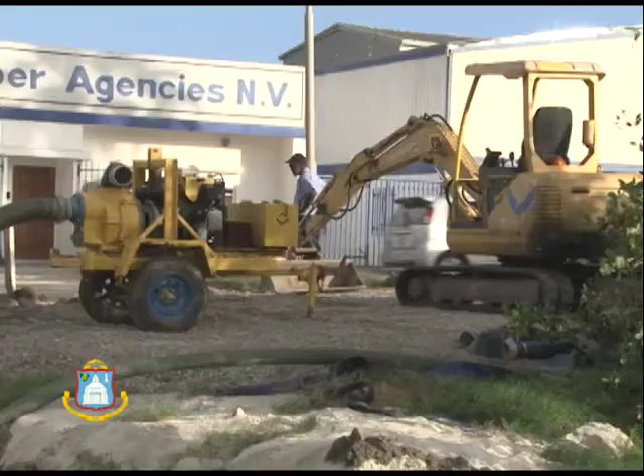In the last torrential rains, we were very unfortunate to have an issue with 2 of our pumps, which made water management a little more difficult for us than we had hoped. One of the problems was that the salt pond could not take all the rainwater that came in one shot because the floodgate only had a certain capacity. To be very precise, a maximum of approximately 5 square meters area of passage. The expansion, in accordance to IHE UNESCO, is going to now create anywhere between 10.5 to 12 square meters of passage, meaning that we have built for a 100-year storm.

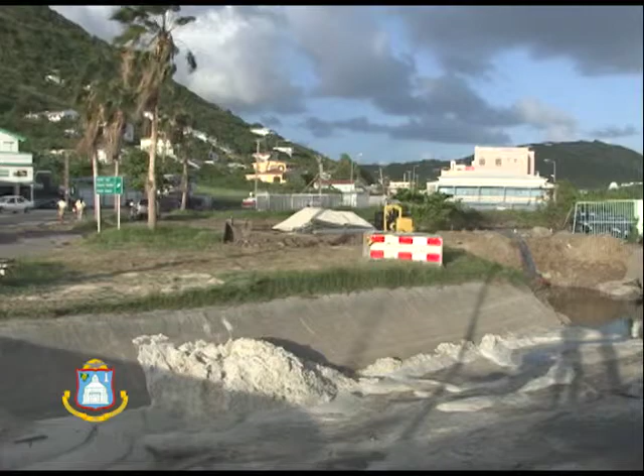All of the water that comes down in the channel behind the ball field, because that's the Zeger's Gut channel that comes down by the bridge, all of that water will be directed directly to the floodgate, and the new floodgate will open up, and that water will have a free passage. A passage that can take all of the water that is accumulated in the hills through that channel. It is constructed in such a way that the water speed will not exceed the danger limit of 3 meters per second. So the water will not flow faster than 3 meters per second because we have enough volume.

These are the thoughts behind the construction design of that second phase of the IHE UNESCO plan, which we are now executing. The third phase, which is now being prepared for tender, is the extension of the Zeger's Gut Trench all the way under the Zeger's Gut Bridge, behind the bird lookout, making a 90-degree turn towards the floodgate. That is the third phase. That phase will be constructed in 2015, and then we would have complied with the IHE UNESCO requirements to be able to do proper water management of the salt pond and the fresh pond.

Today I will explain to you the time frame and the project of the second part of the IHE UNESCO report requirements, which is the expansion and reconstruction of the floodgate located at the A.T. Illidge roundabout with Zeger's Gut. The commencement time has been set for November 2014. Anyone that has passed the floodgate lately would have seen some maneuvering going on down there. There were two stages. The first stage was to allocate all the utilities, and the second stage was commencement of work. On both sides of the floodgate, we are confronted with utilities.

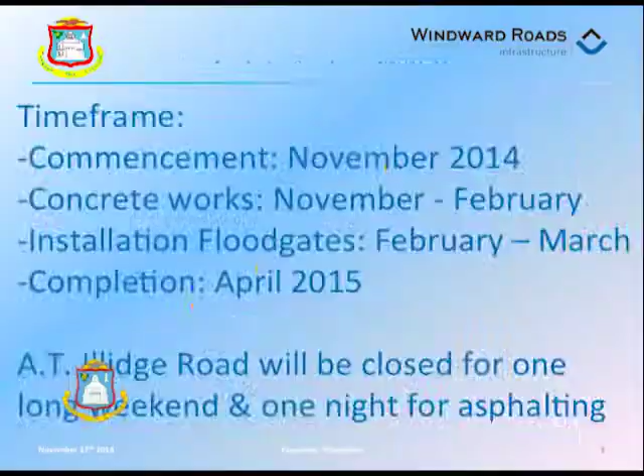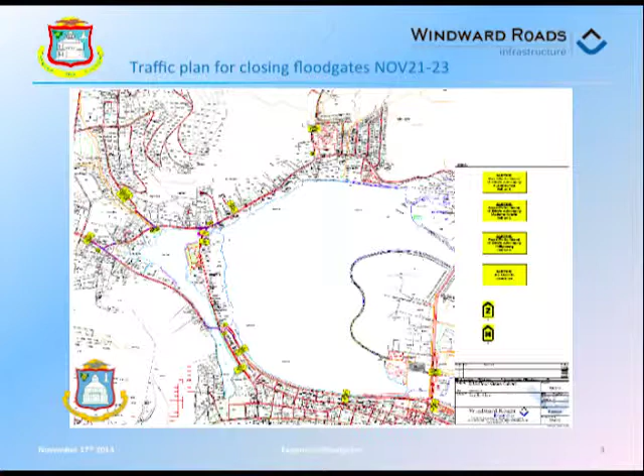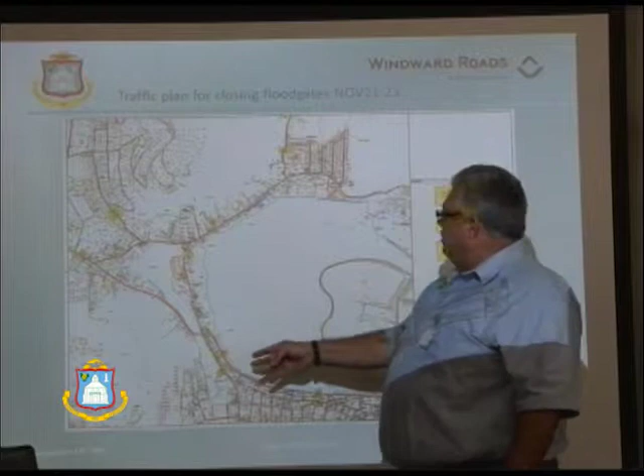At this point in time, I'm going to move towards the board so I can give a better elucidation of what's going to happen with the traffic starting tomorrow night at 7 o'clock. This is the floodgate here. This is where the works are taking place. Anyone coming down from Mount William Hill or from the Arch Road cannot use the A.T. Illidge Road once they pass the roundabout or the Eddies Auto Supply. They'll have to continue on to Zeger's Gut and get on to the Bush Road. If they want to go to town, we would advise them, take the Arch Road, take the road by the dump, and you will get back into town much easier.

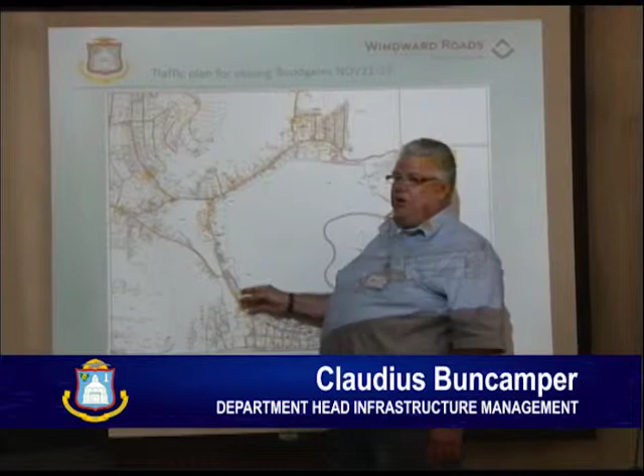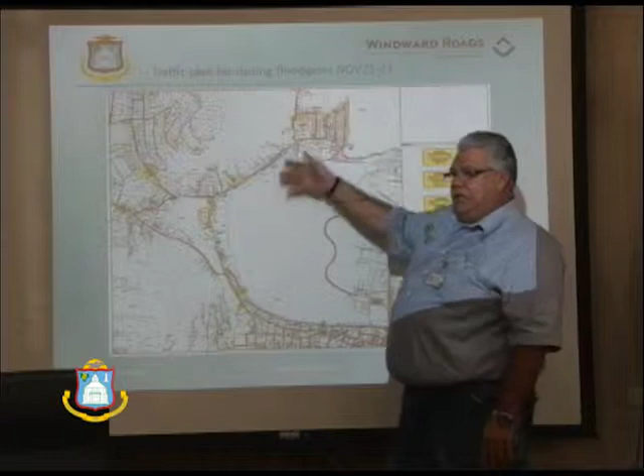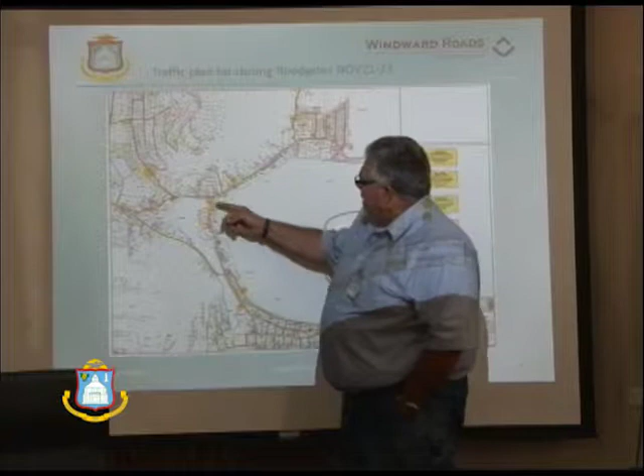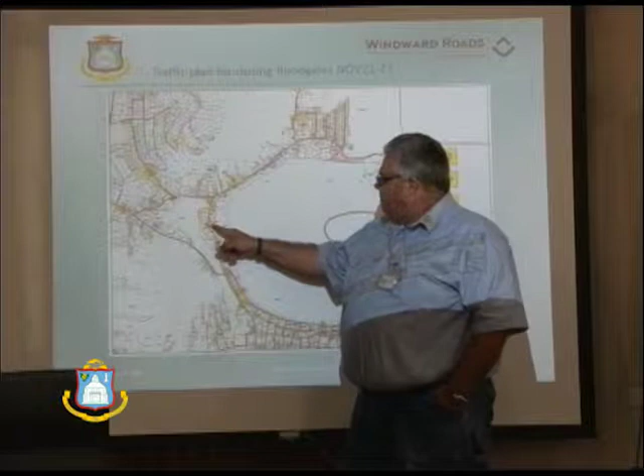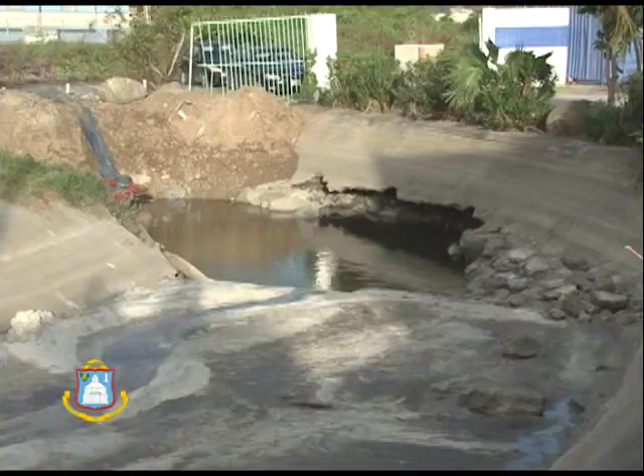This road closure starts on Friday evening, 7:30 to 8 o'clock. And we are working 24/7. So there's no break in the work until the culverts have been laid, the road has been compacted, the asphalt has been relayed, and the road has been opened. We are trying to make the deadline of Monday morning, 6 o'clock. Mr. Raymond Chittick is the one that is fully in charge of this project. He will be assisted naturally by Mr. Edelmiro Janssen, the operations manager, and Leah Danya, because we are talking about a continuous work schedule of 48 hours. They are human beings, the contractors are human beings, so we will be rotating every 12 hours. So the one you see in the morning, you will not see him there at night.

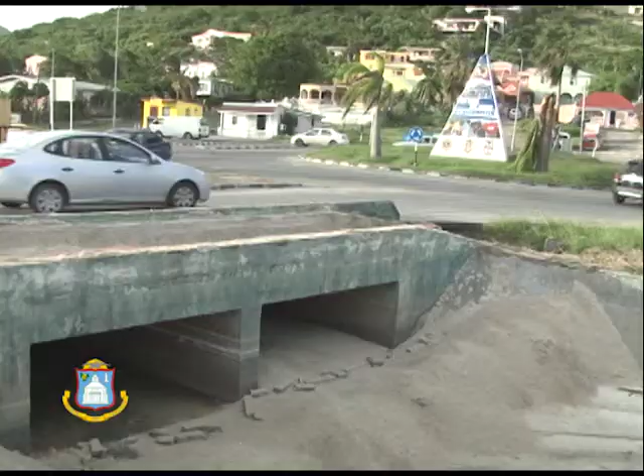If there is a change, for whatever reason, the PR person of VROMI, Mrs. Velasquez, and or Mr. Chittick will, through DCOMM, pass on the necessary information to the media that you can print on Monday morning that the project has hit a snag and the road is still closed. So we will then try to get that information out so that the road users will not be surprised on Monday morning when they're going to school that they can't use the road. We will try to make sure that we can pass on that information. But again, we hope to have it ready by Monday morning, 6 o'clock.

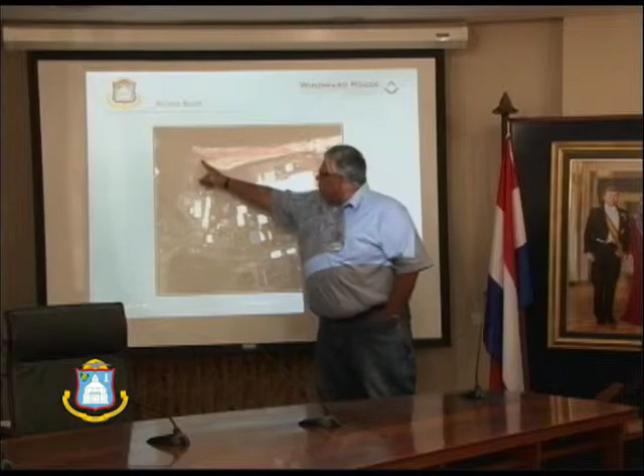To ensure that these businesses do not suffer unnecessary interruption, because they will suffer interruption and we are aware of such, we have created a thru pass in the back here, right back into the big parking lot behind the Faircus, so that clients can park there and the people can get to their business. And for Globe Dial Basket, who's located over here, we will see if we can still maintain a walkway so that walking clients can especially get to that particular area, as many people go to buy flowers there and order a basket for the Christmas season.

So we will try to accommodate if the safety aspect can be guaranteed on the project. If we cannot guarantee this safety with the passage, then we will not do so. Then they would have to make use of the road that we have created for them.

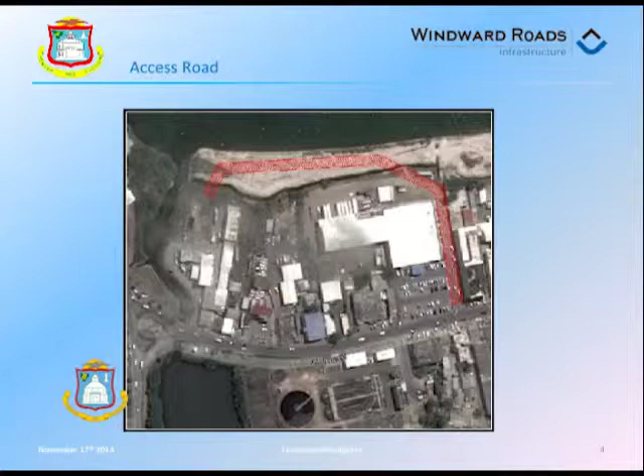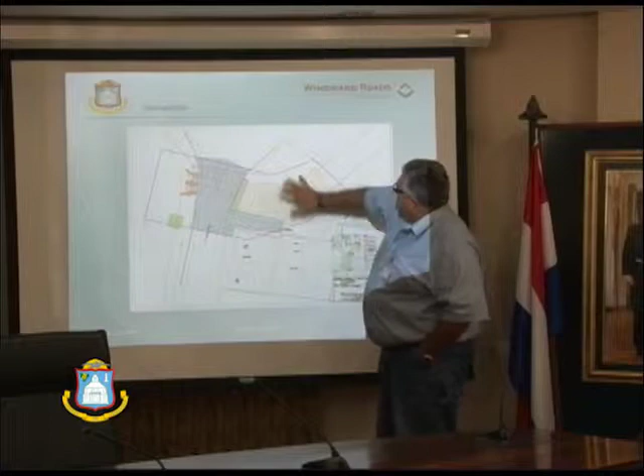This is the project description area. There are three principal pieces. This is the culvert as you know it now. This is the roundabout up here. This is Faircus, Odibad agencies, Faircus, etc. This that you see in blue is being demolished completely. It's coming off completely, coming out. So this road deck will be shifted and moved.

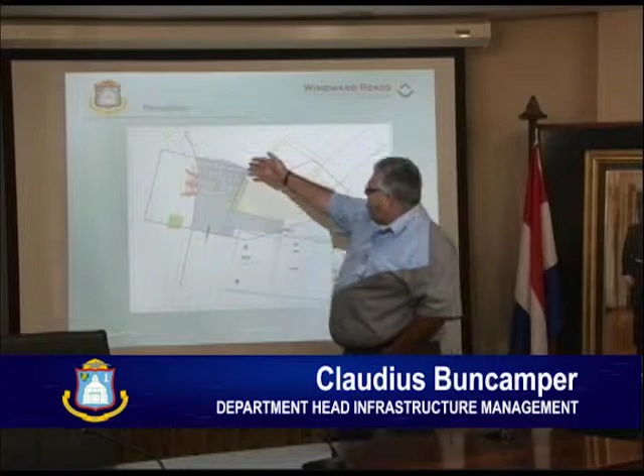This green that you see here is the existing culvert. You can see it over here. This is the existing one. This will be removed. You can see it in yellow. Whatever you see in yellow means it's being removed. This blue is being totally rebuilt. The difference with the old project and the new project is this was the culvert.

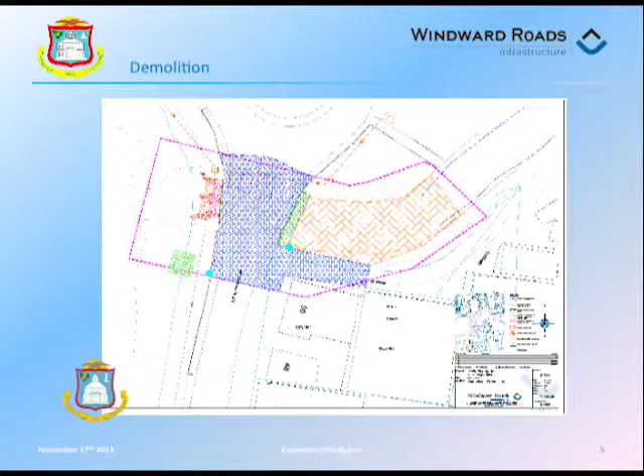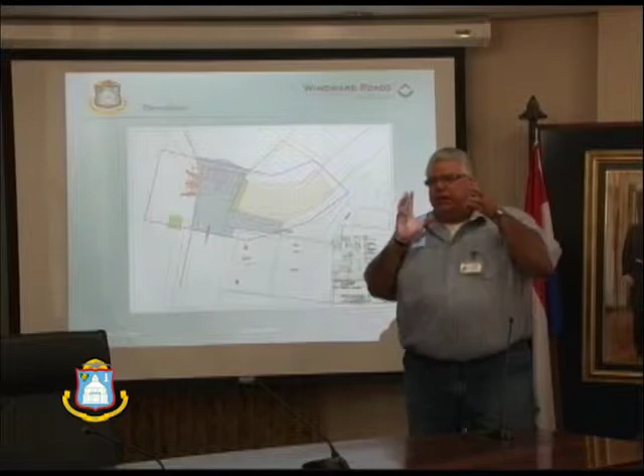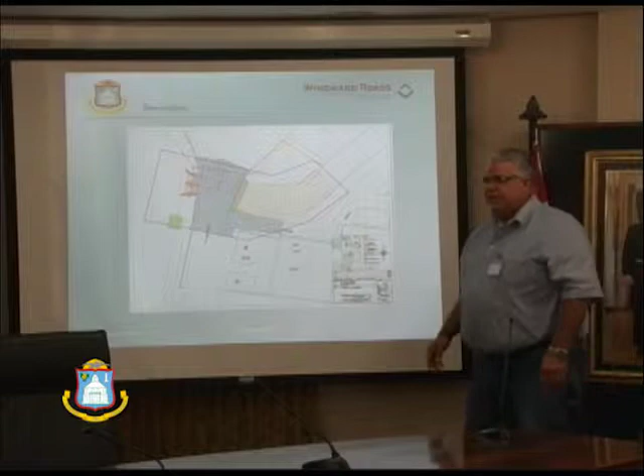This is the old line here. This was your culvert. The new line, you can see, comes all the way under and goes under this blue, which is road. So we are going back to the system that we have used in the past in Wellington Road, where under the road the main culvert lies. And it comes out there beside National Car Rental. You see a big discharge into the lagoon. That concept is being used under here.

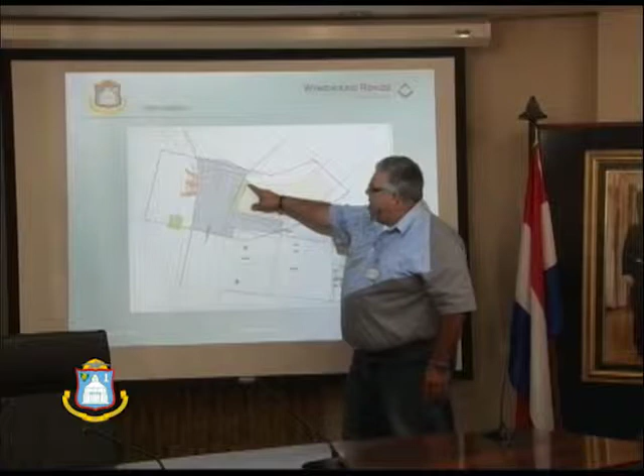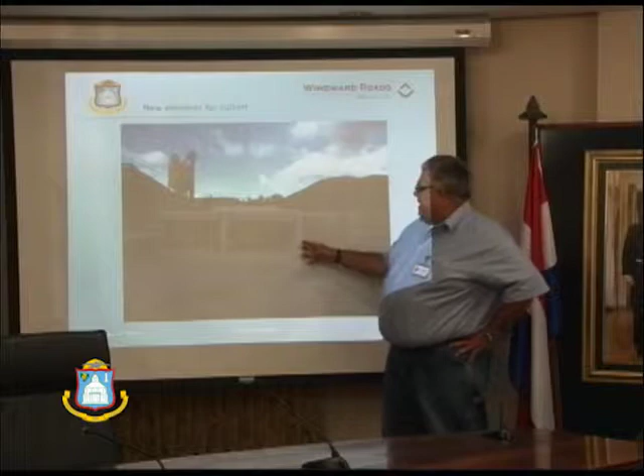This becomes the new trench, from here to there. This becomes the new passage, 10 meters in width. Right? These are how the concrete culverts look. So to give you an idea, this is being laid beside the existing culverts. So this is not replacing, this is the new section that we added in. You can see they're of substantial size.

Starting Friday evening, 7 o'clock, the intention is to place 14 of these at the roundabout. 14 of these are going in, and that will be the expansion of the culverts itself. That is just one section, right? You can clearly see it here.

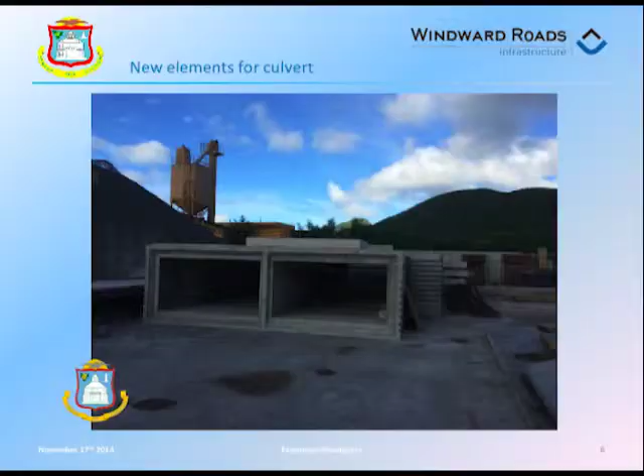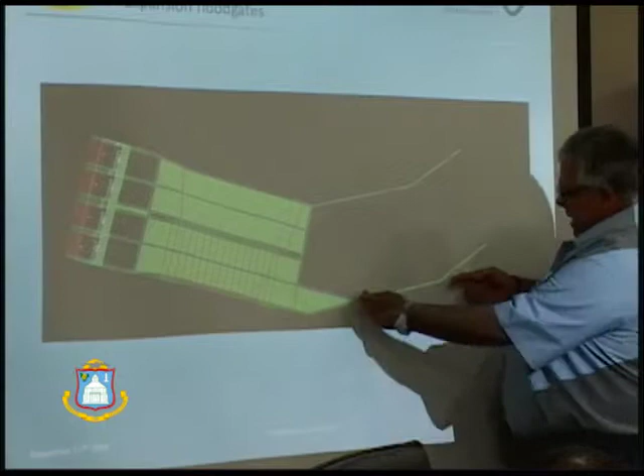This is more a technical aspect of what's happening. All of these are the 14 new ones that are coming in. This is the existing one. We are now placing this one here. And you can see in the past, the road was going like this. Sorry, like this. We are now taking out a piece of this road, creating a new culvert, and putting a different bend in it to be able to now take out all of the water.

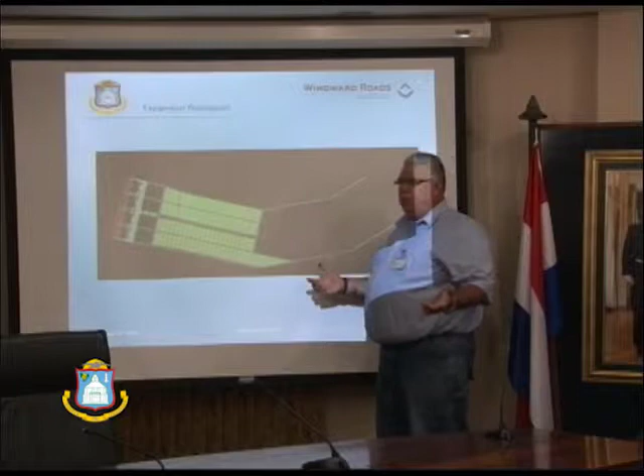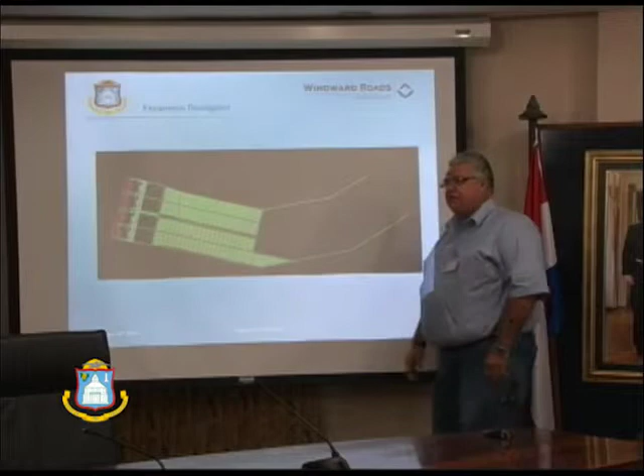The past culvert was something like a big, lazy U. It is now becoming a big, massive U. And these retaining walls that you see here in green are going in immediately. That's why we are now ripping open the back part already. Go ahead.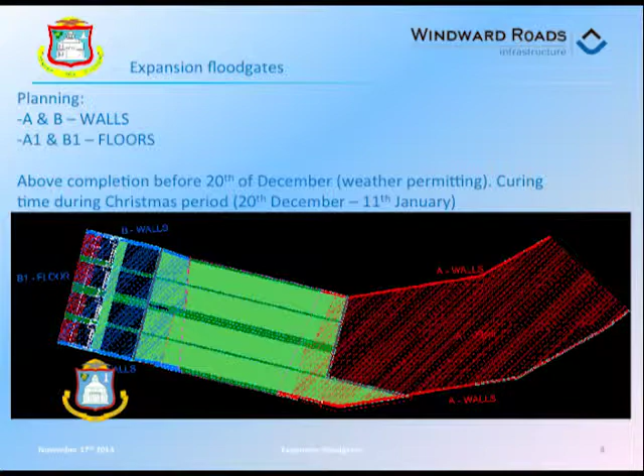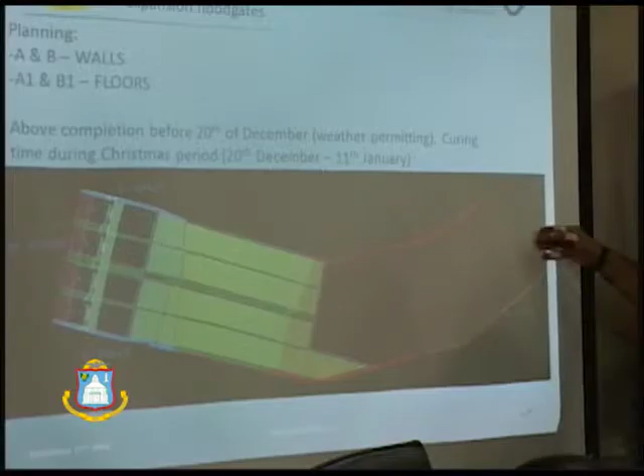Just to give you an idea what will happen and the time frame it will happen. What we call the A walls and the A floor, that's what you're seeing being dug right now on the eastern side. Consider this, please, the road and the roundabout is here, just to give you all an impression of where we are. This that you see in red here is the road, just for safety's sake, so that you understand. The pink lines are the road.

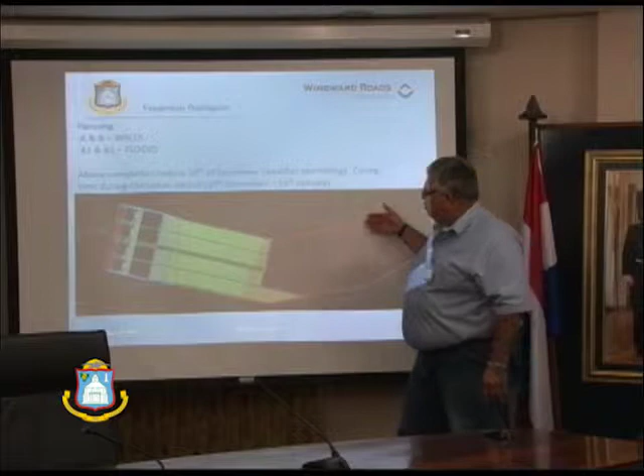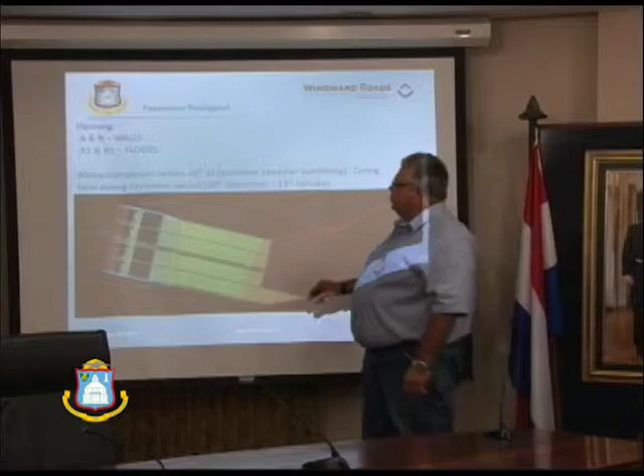We are working beside the road here. This is coming out, and the whole new retaining walls and new floor. So the new gutter on the eastern side will be in before December 20th. Before we go on Christmas holidays, this is completely in. The same goes for part of the B walls.

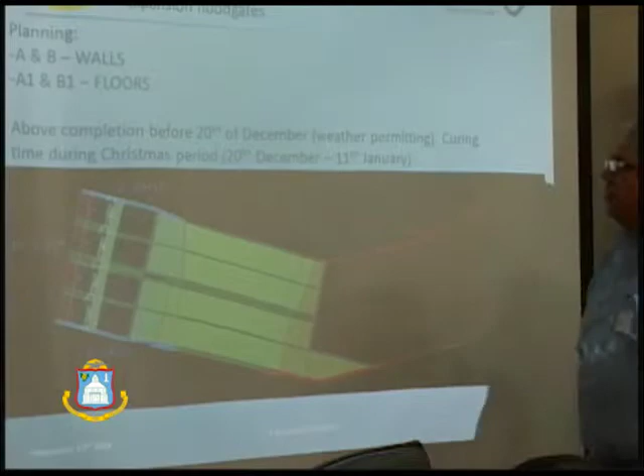That is these sections and the B floor where the floodgate is going to be rested on are all going in prior to December 20th. There's a very specific reason we are forcing and pushing this work. This concrete needs to cure. And we want to use the recess holidays of the contractors, which is from December 20th to the 11th of January. That gives us 3 weeks of time for the concrete to cure.

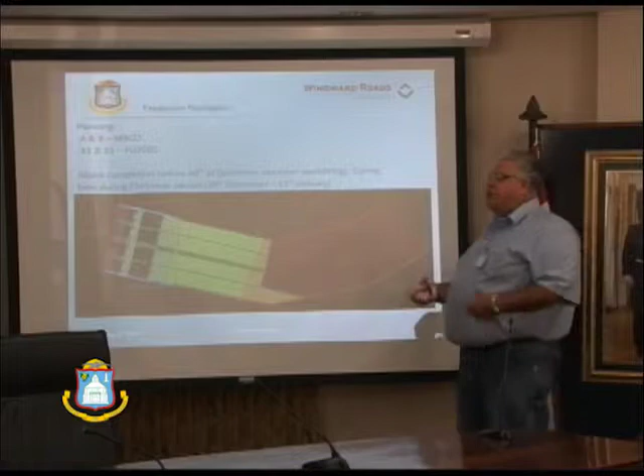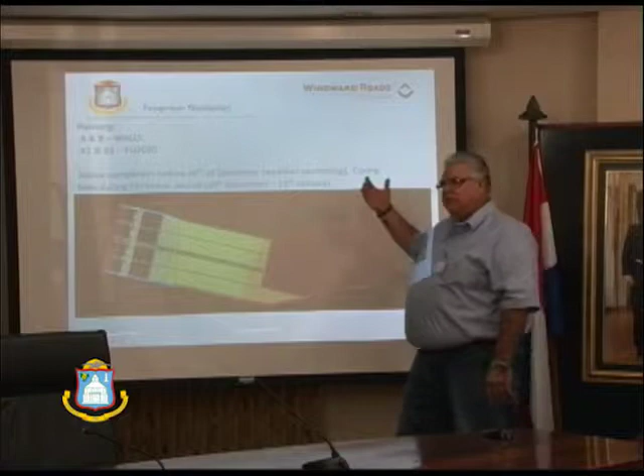This concrete is approximately 25 to 30 centimeters thick. It needs curing time, and water can pass over it, but the concrete needs time to cure. So in that context, it will flow as a trench. That's not an issue, but it needs to come to strength. And that's what will happen during the Christmas holidays. The road is fully usable and will be fully operational and open.

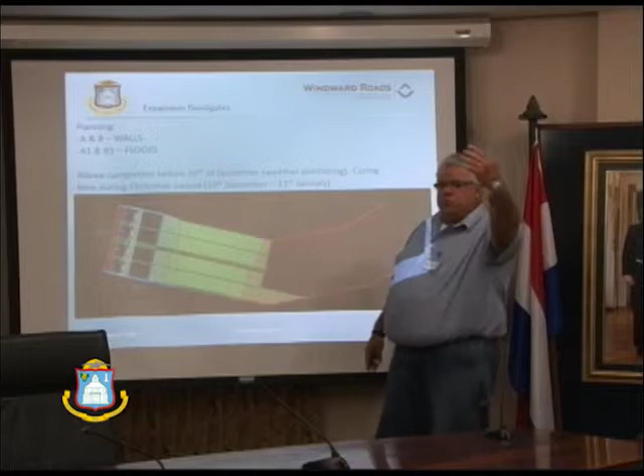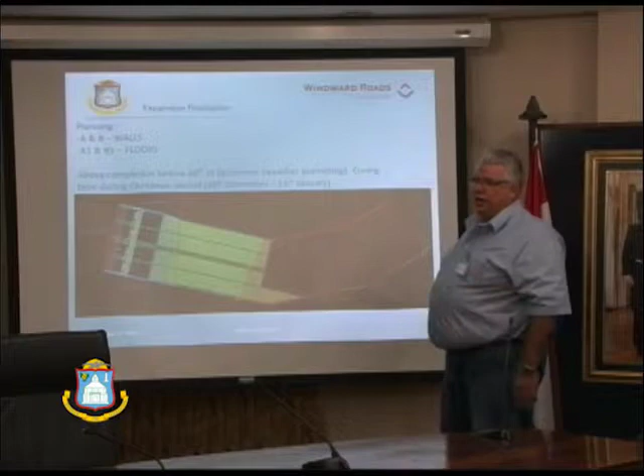The only thing that is not open is naturally the passage coming in here. This passage still will not be usable because this wall would have been poured, but this would not have been poured. And this is the driveway into these properties. So again, Faircross and them, Glow, Dial Basket, Dow's Musical Foundation will not be able to be reached from the A.Th. Illidge road. They have to make use of the alternative road that we created, turning in there by Sonny's Food in the parking lot, just driving straight to the back. All the indicational signs have been made and will be up prior to opening up the road and destroying this part of the road. Next one.

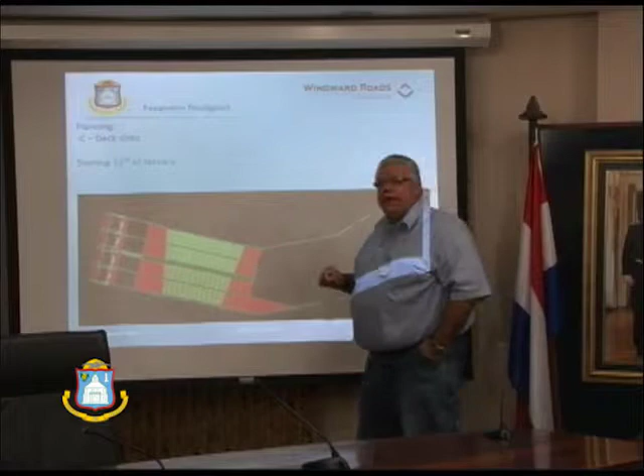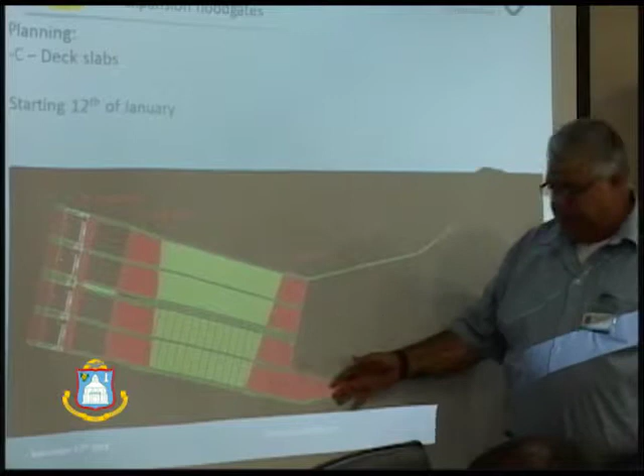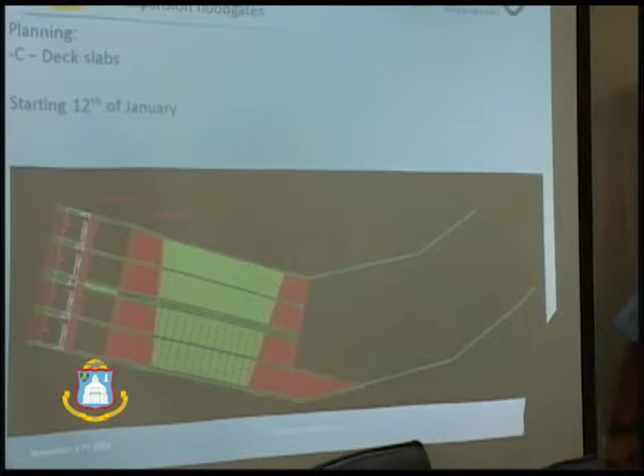Starting the 12th of January, once we have had the curing, we will be putting in these three decks, and this will then make the access to the businesses on this side usable, let's say approximately the end of January, because these decks are 25 centimeters thick, I believe. What do you think? 25? They would need a curing period of at least 2 to 3 weeks. So we hope by the first week in February to be able to open back up the access to those businesses that they lose starting Friday now.

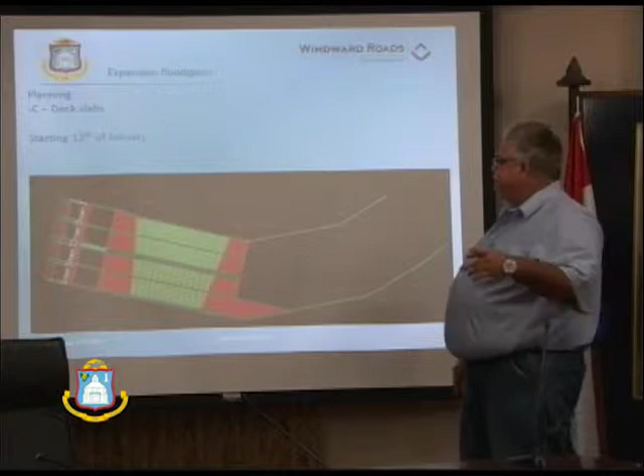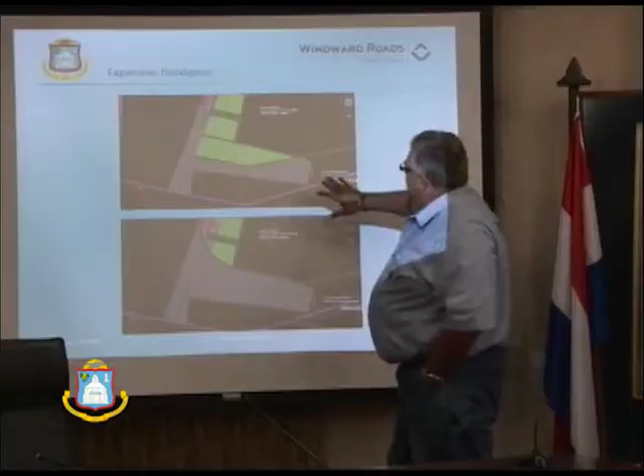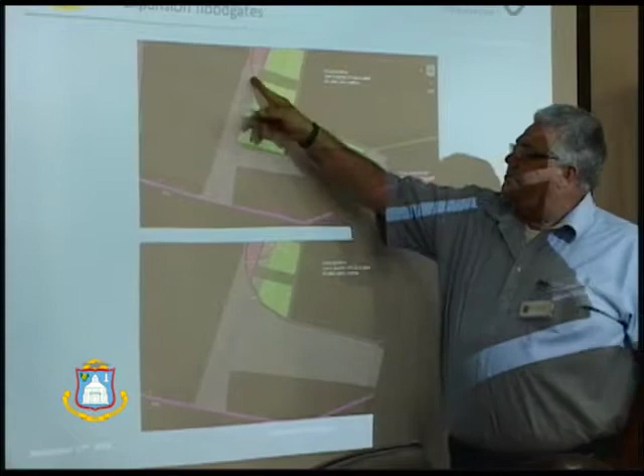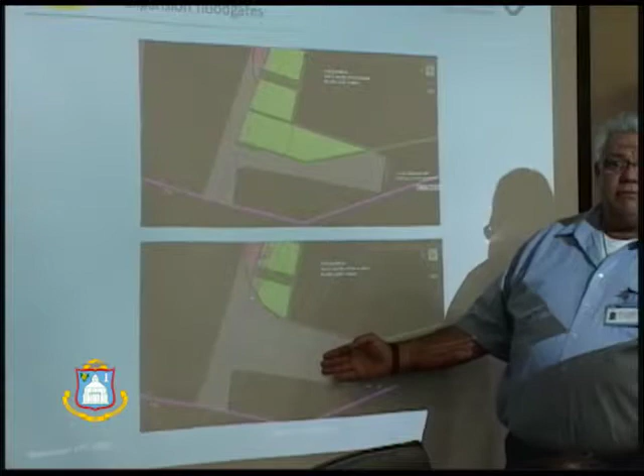This is trying to give you a view of what is exactly happening by the floodgate. This is the section of how it will look in the new version. So this is the road, as you see how it used to be. This is what we are now taking out as road, putting in floodgate underground, putting in huge pillars in here, and then covering it back up with concrete and tying it back onto this point over here. So this is what you will then see here. Basically, this coverage comes on, and then the trench remains under here. This is the trench. This is the road on top of the trench. Just to give you an idea that under this road, there will be a full trench. That's the concept of the floodgate.

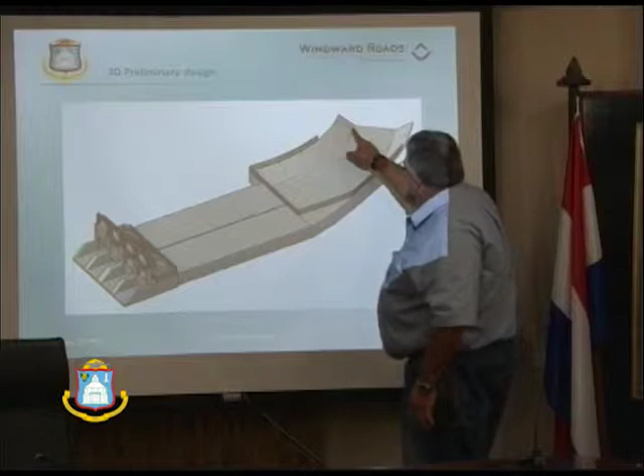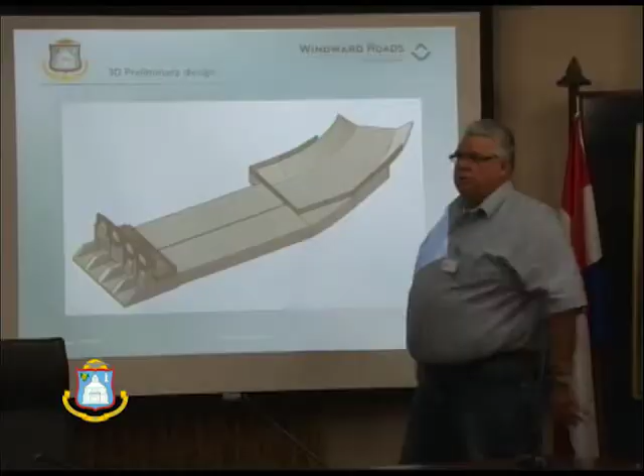Right. This is how it will look schematically. This picture is not a correct picture. Please don't use it as such. I know it looks pretty, and it will fix up your front page, but it does not exist like this. This was the original design, which was turned down because we wanted a full U and not a lazy U. It's a deeper layout and a stronger layout. We were afraid that the sides might be damaged faster because we don't have full strength on how to hold the wall together with steel and so. So we preferred a section of standing walls instead of slanted walls.

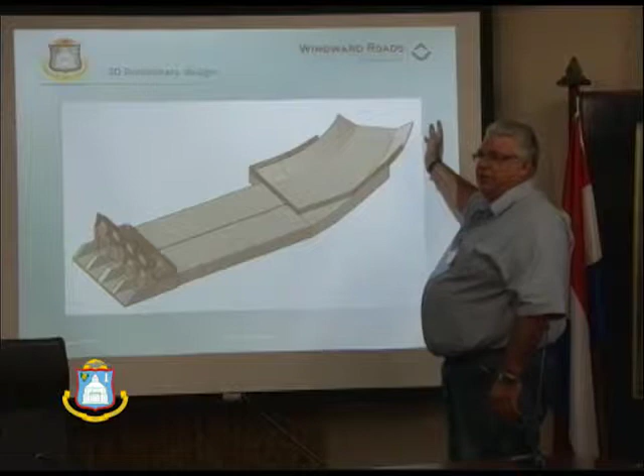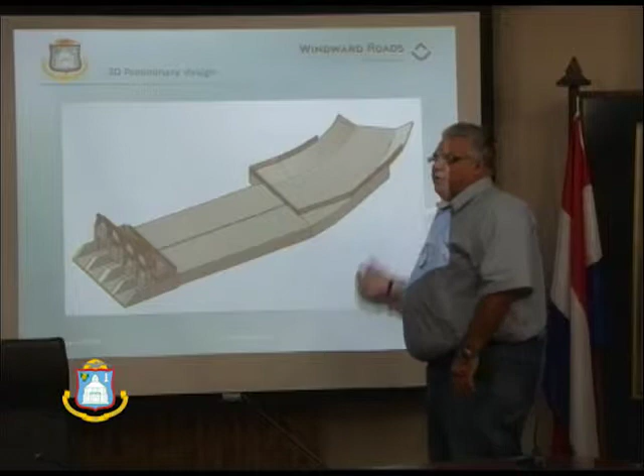And then we would not take more property from the owners next door. By putting the wall straight up and a little higher, we would safeguard their property loss and at the same time prevent water being able to go over the wall into their property. So it was a win-win on both sides.

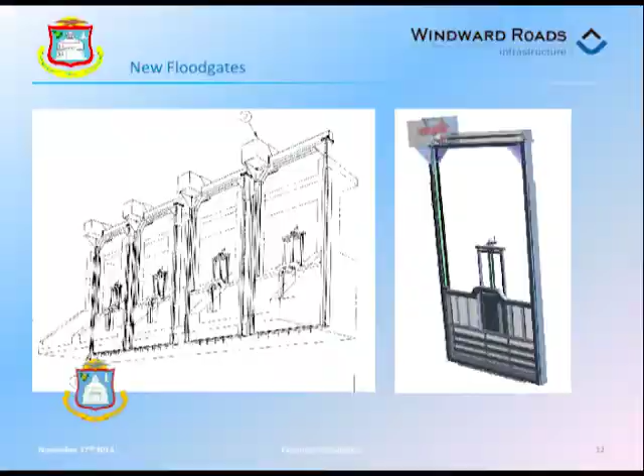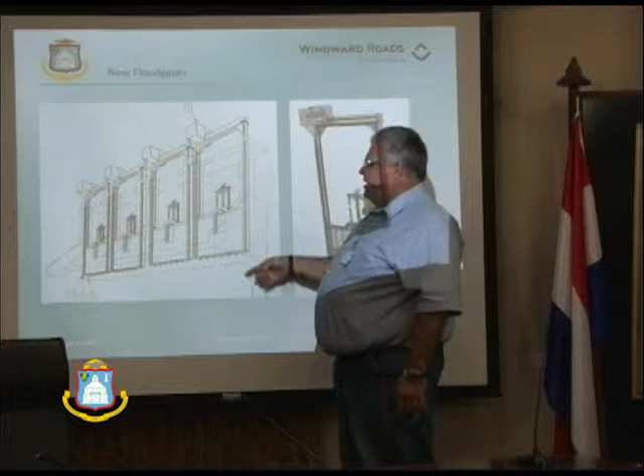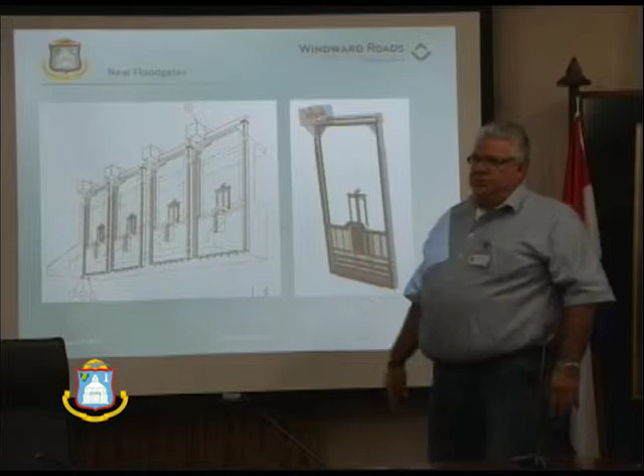Well, these are the floodgates. Please don't underestimate these heights. These are about 4 meters in total. This is a very impressive structure when you see it. It's being built right now in the Netherlands to meet the standards that we have set. There are 4 gates in total. Each gate is 2.5 meters in width and can go approximately 1.5 meters high. So you have 10 times 1.5 meters is 15 square meters of water passage. And you can do the math very simply on how much water can flow through there.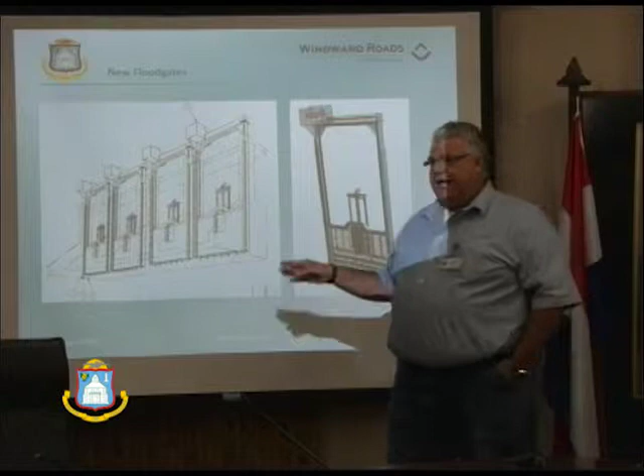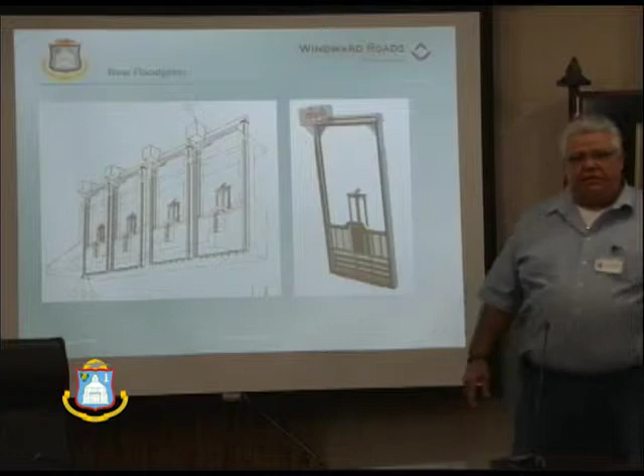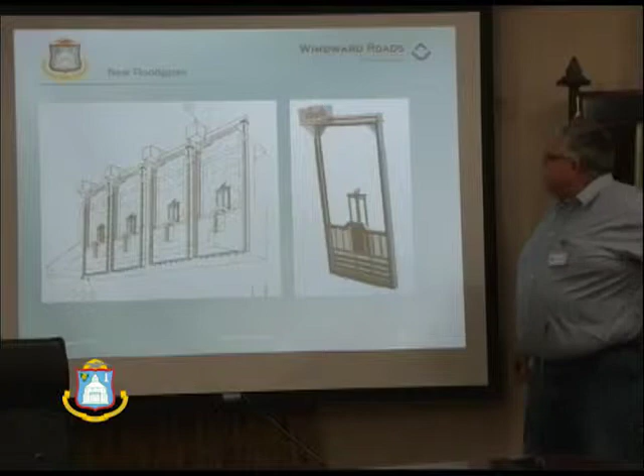These things are controlled fully mechanically. They can be manually controlled also, but they are tied in on the electrical grid of GEBE, backed up by the generator of the sewage plant, which we have in our maintenance, and is a brand new generator that can carry the gates and the sewage plant very easily. Naturally, this will fall under the operations of water management again, and we hope to have these gates fully operational around March, latest April 2014, putting phase 2 of the IHE UNESCO project into operations.

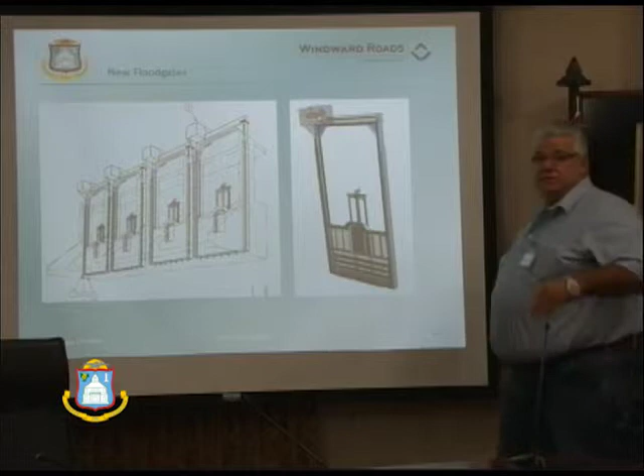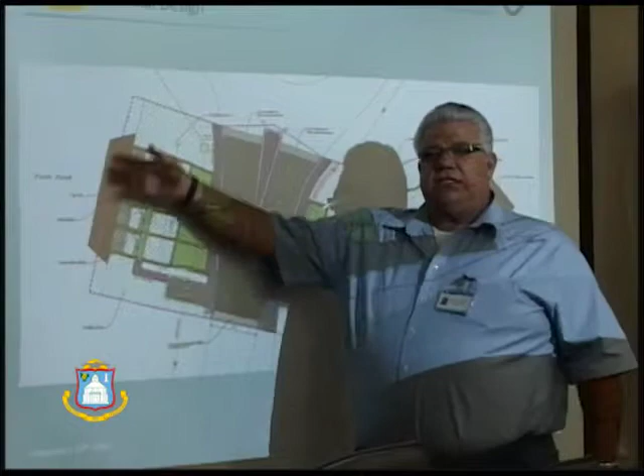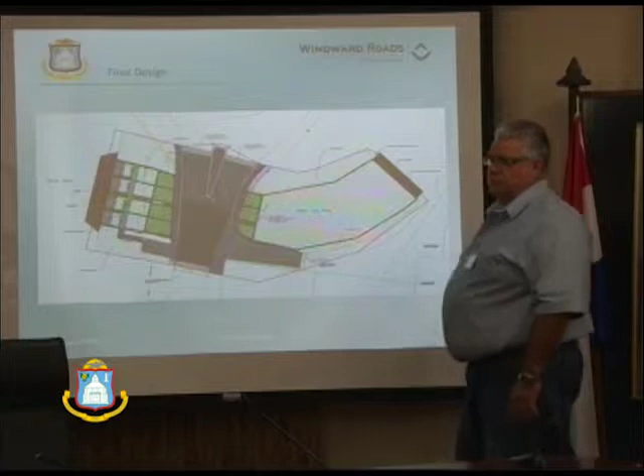This is how it will look when it's finished. When you look from on top, a complete rock revetment on both sides to prevent any kind of unnecessary erosions. You know, we are still not fully aware of the final workout of the ring road, so we're going to protect this complete area with a rock revetment to ensure that when the water also goes in, it goes in without too much speed. We want to slow it down a little bit.

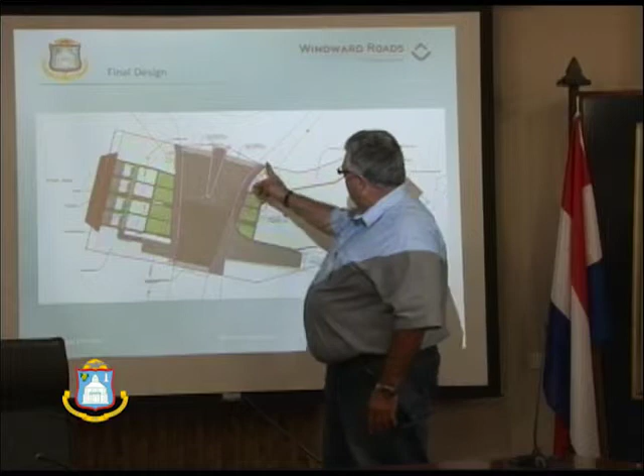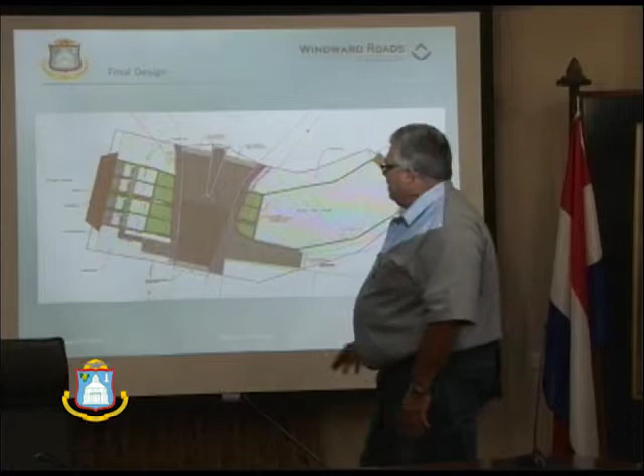The new road, in principle, the walkway remains. We create a walkway over here, parking over here to work on this structure. So at night, you don't have to go and fight to look for parking. No, there's parking there. This structure is high enough that it warrants you to climb it with the stairs. You cannot just walk up like you walk up to the floodgates right now and stand up and look. You must climb up the stairs to be able to operate the floodgates.

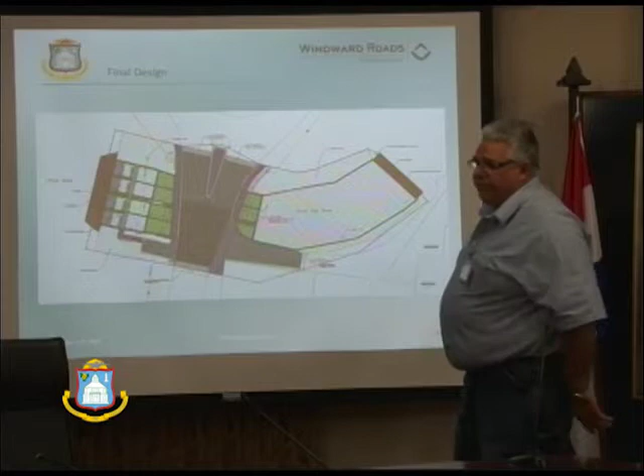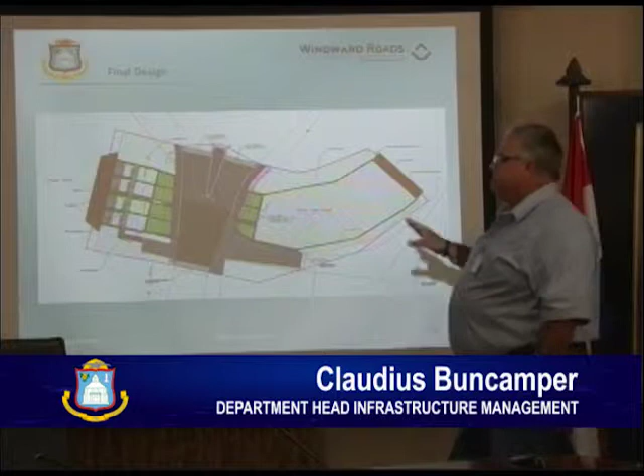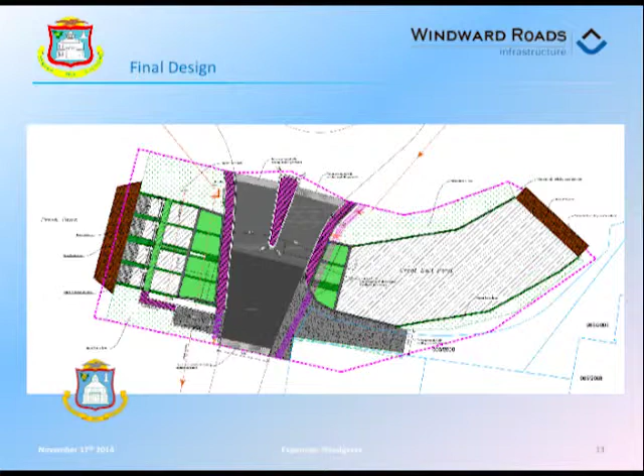Now, like I said, it's an impressive site when it's finished, and it should do us proud and give us some more easement in water management from the fresh pond to the salt pond. What this floodgate can also allow, but again, with control, is to move water from the salt pond to the fresh pond. That would be if you would have an overflow like a Lenny, or like what we had in significant torrential rains, and you would want to open Great Bay Beach. We can open the floodgates and move water from here to there until we reach what we call the average level of the discharge to the sea and the pond, and then the waters will settle and they will not move anymore.

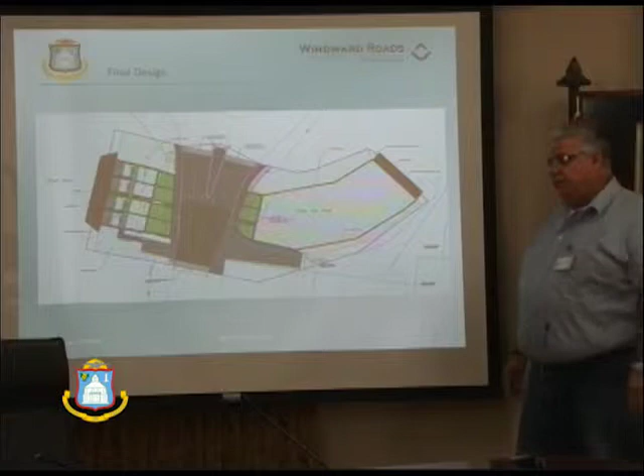That's, I believe, in a nutshell, the last slide on what's going to happen and the time frame it's going to happen in. The project area does not affect the environment, to our opinion, in no form or fashion. The project was designed based on IHE UNESCO, that is the organization based at the TU Delft. They designed, the criteria was given to us. We have not moved any mangroves or anything to that sense. The only species that might be affected is the tilapia, the invasive, non-indigenous tilapia species that causes more harm than good to anybody in Sint Maarten. Other than that, I don't foresee any environmental aspects being brought into question with the building of the floodgate at this point in time, no.

Okay, and my last clarification is the 14 structures that are being put in place, what exactly do you call those? Those are just culverts. Those are the culverts. They're part of the culvert structure of the expansion of the floodgate. Undoubtedly, this is a massive undertaking, Mr. Buncamper. You're referring to a time frame of 3.5 months to be completed? Yes. Approximately how many persons will be working on this project to realize the time frame that you referred to?